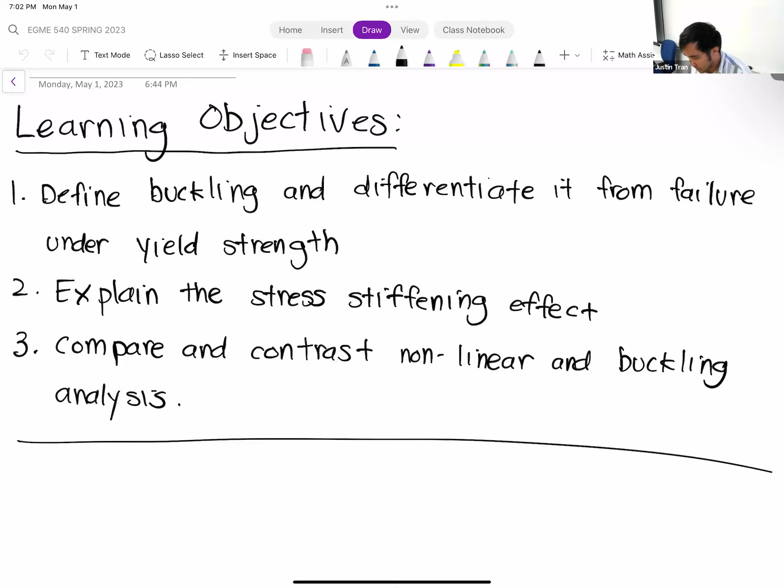Okay, all right, so let's go ahead and get started. Today's lecture should be pretty short, so hopefully we'll end early, just because the amount of content is not that big. The topic for today and the topic for our activity Wednesday is this idea of buckling and stress stiffening.

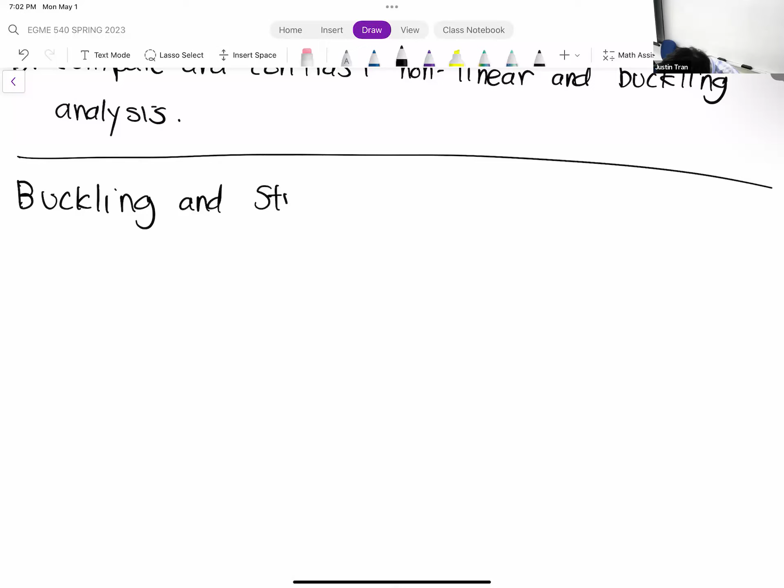So I kind of saved this topic for last for a couple of reasons. The main reason is because it's pretty simple, there's really not much to it in terms of answers, so it should be a fairly short activity. Today's a fairly short lecture as well. I think it's kind of good to end on something like this, especially as everyone's starting to work on their final project. But I think it's also a little poetic in a sense, because it brings us back a little bit to where we started in this semester.

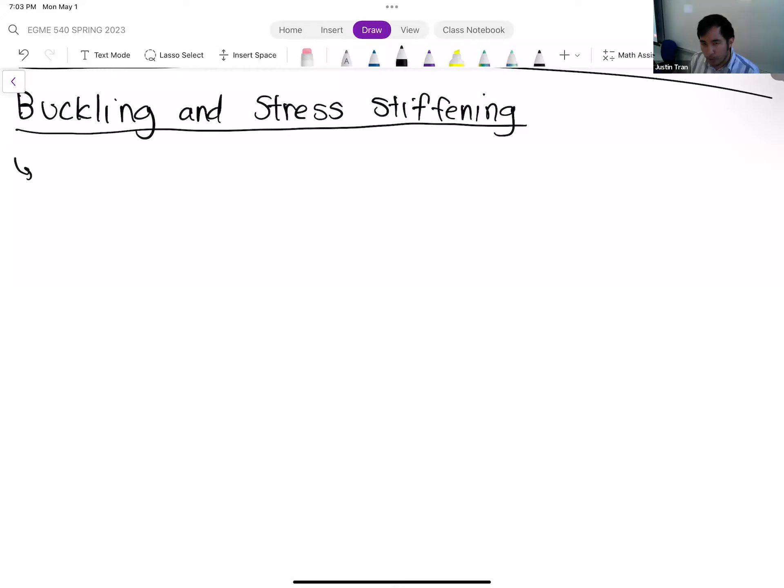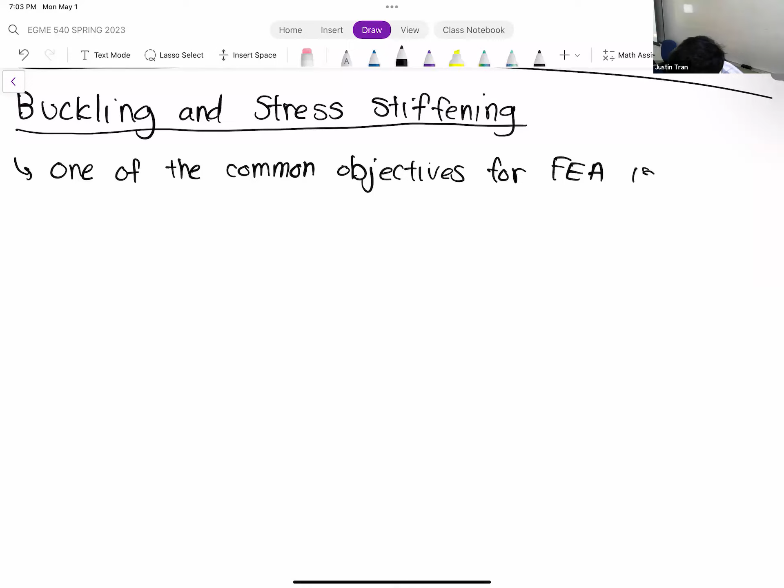Okay, so let me bring us back then. One of the objectives that is commonly used for FEA, for a lot of our activities, is we want to determine if a structure is going to fail under its given load. So we have our structures, we apply our boundary conditions, we apply our loads and constraints, and we want to check and see if it fails. The primary way that we did this was that we ran FEA and we checked the equivalent stress field within the structure.

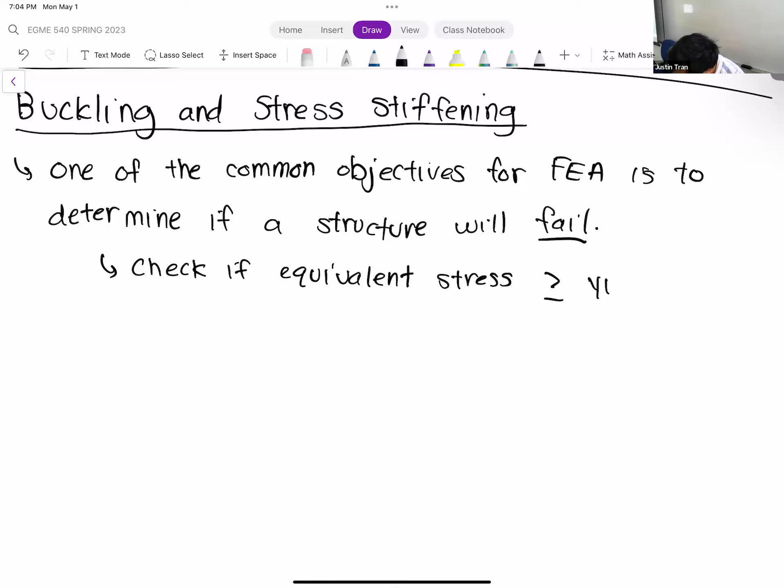And what we said was that if the equivalent stress was greater than, or greater than or equal to, the yield strength of the material, then the structure would fail. Of course, we had things like factor of safeties that would modulate that as well, but generally that was our approach. So we took our CAD models, applied our boundary conditions, checked the equivalent stress, and checked to see if it was greater than the yield strength.

That's one way for a structure to fail, right? I'd say that's the most common way, or the way people generally think about it. But there are other ways that structures can fail as well. This criteria is often reliable when the structures are failing under tensile load, so when the structure is basically being pulled apart.

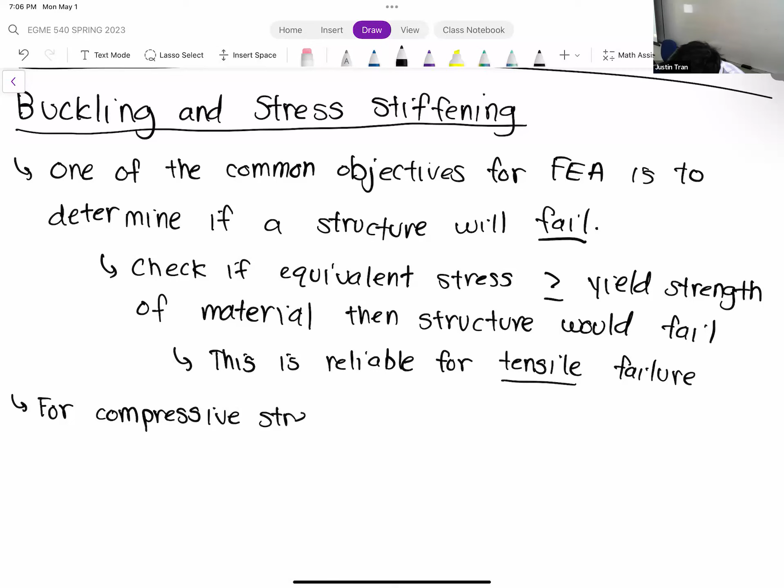So something a little bit different happens when a structure is subjected to compressive stresses, stresses that push the structure towards itself. And so for compressive loads or compressive stresses, we have to worry about buckling as well.

So what is buckling? I think the easiest way to show buckling is through a visual example. Let's go over an example that many people have experienced firsthand, which is crushing a can of soda or a can of ginger ale, or just whatever you drink from a can.

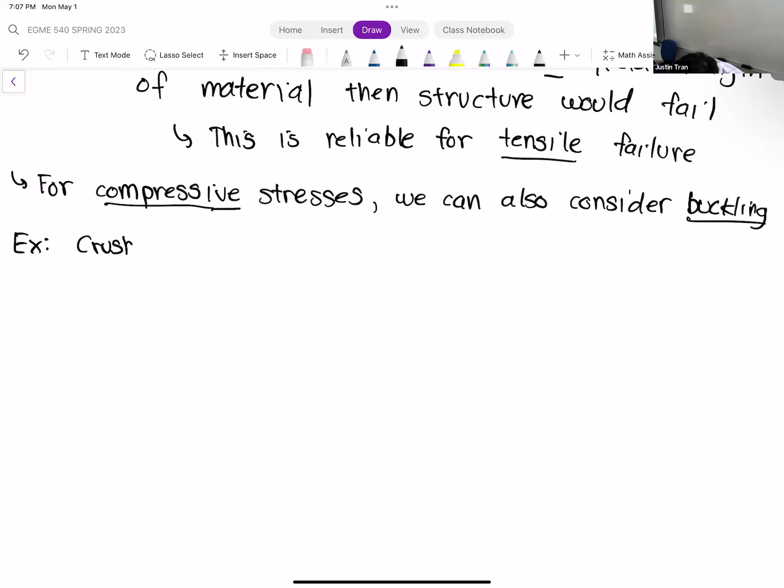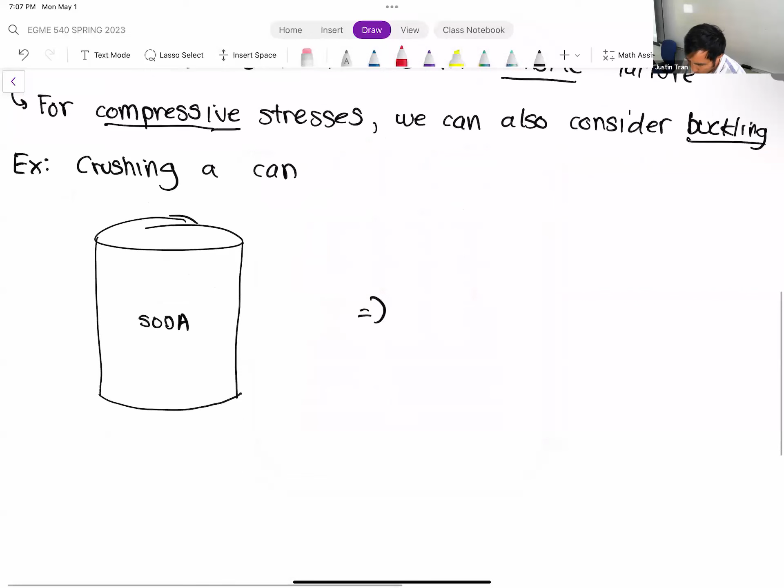So let's say that we have a can of your favorite soda, unspecified because I'm unsponsored by any soda companies, at least not that I'm aware of. Let's say that you put this can of soda on the ground and you step on it with your foot. What that's going to do is apply a compressive load, loads that squish the can like this.

What you should notice, and what you can probably imagine in your head, is that this soda can is going to crunch together, right? So it's going to end up something like this, much shorter than it was before. It still has its ring shape, but the structure is compressed like this. And so the sides of the soda can have almost crumpled, like a piece of paper.

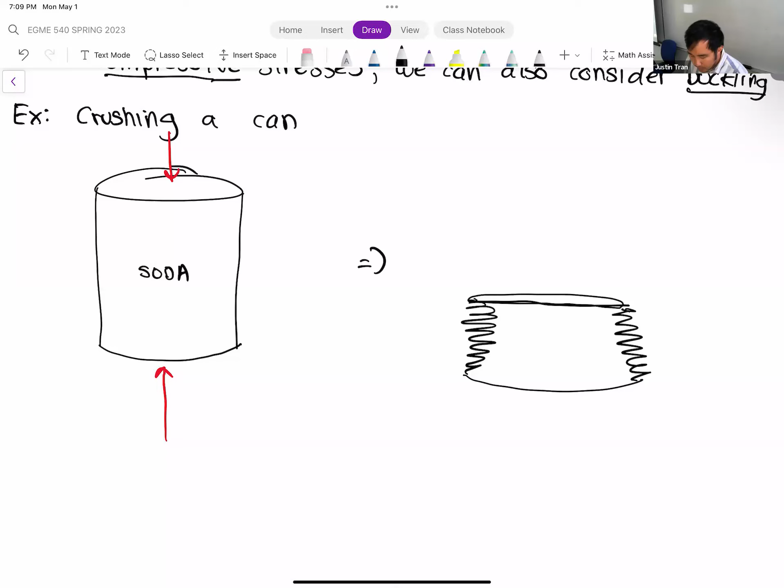So what's happening here is actually interesting. On one hand, you can postulate that by applying this compressive stress, or this compressive load, we've increased the amount of equivalent stress in the can beyond its yield strength, and so what we're observing is yielding. That is possible, and that could be the case for some cases. But another thing that's happening here is something called stress stiffening.

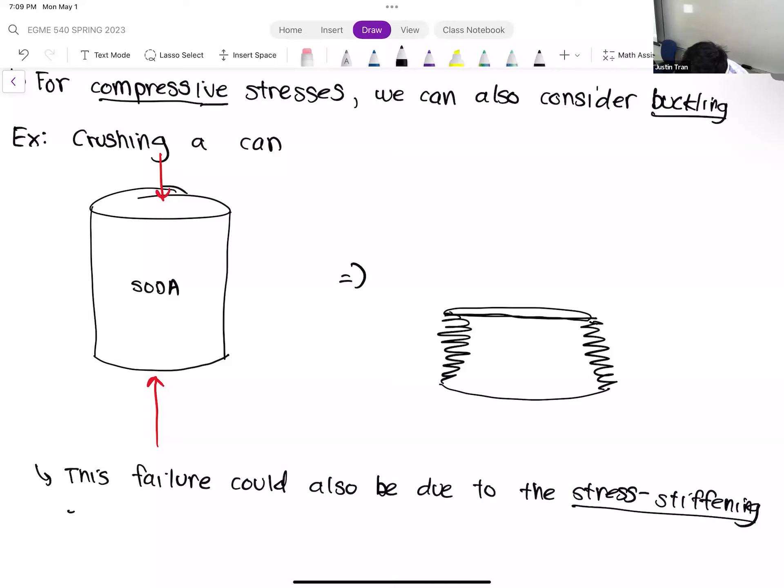And so the stress stiffening effect gives a reason why we see that kind of jaggedy look, that crumpled look that you associate with crushing a soda can, or even crushing a water bottle as well.

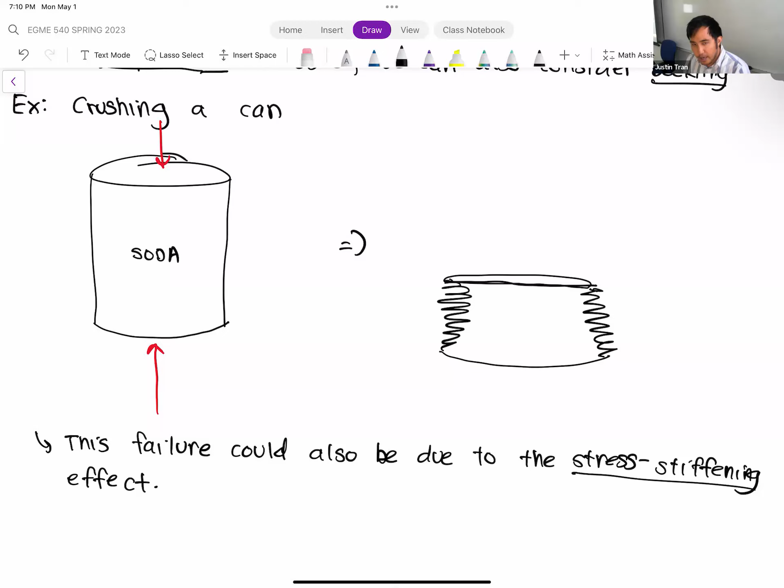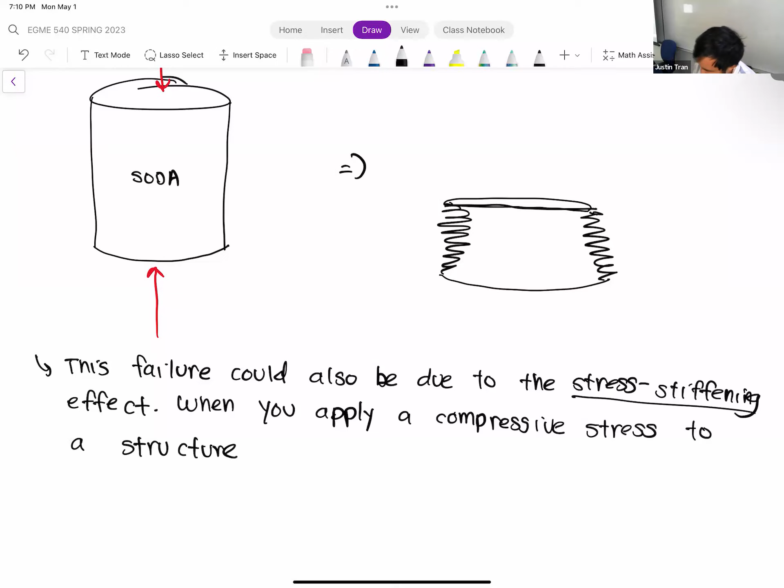So the name for this effect is kind of interesting. Normally this effect is brought up in different contexts, that's why it's called the stress stiffening effect, but we're actually going to be looking at the opposite, so you can almost think of it as the stress weakening effect. Because what happens is that when you apply a compressive stress to a structure, basically a stress that's going to push the particles of the structure closer together, the bending stress or bending strength of the material will go down.

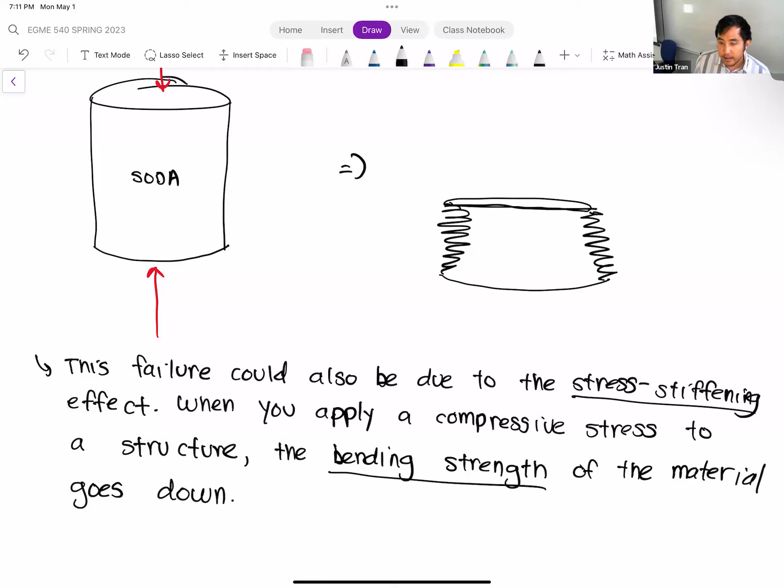And so, of course, the operative word here is bending strength. Bending strength is basically the ability for your structure to resist bending moments and bending failure. So it's very specific. And if you look at the structure of this crumpled soda can, you can see that I drew it in a very specific way with lots of bends, right? So all these jagged points are basically lots of bending failure.

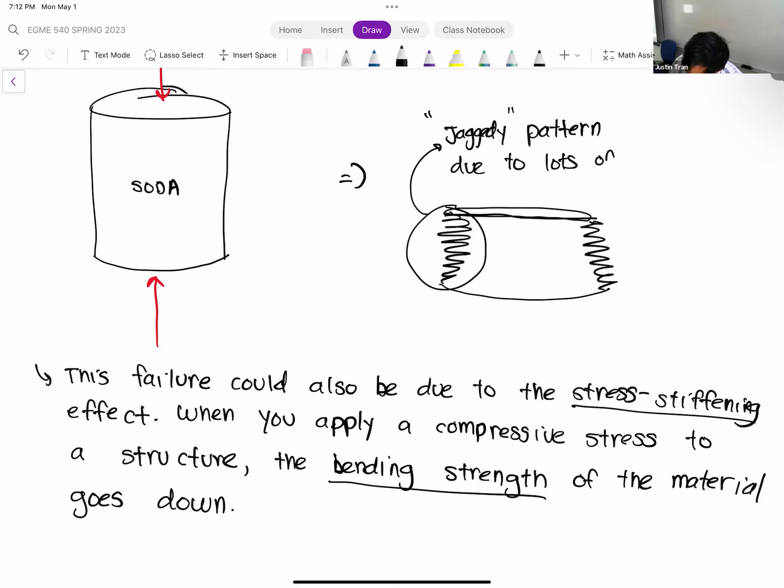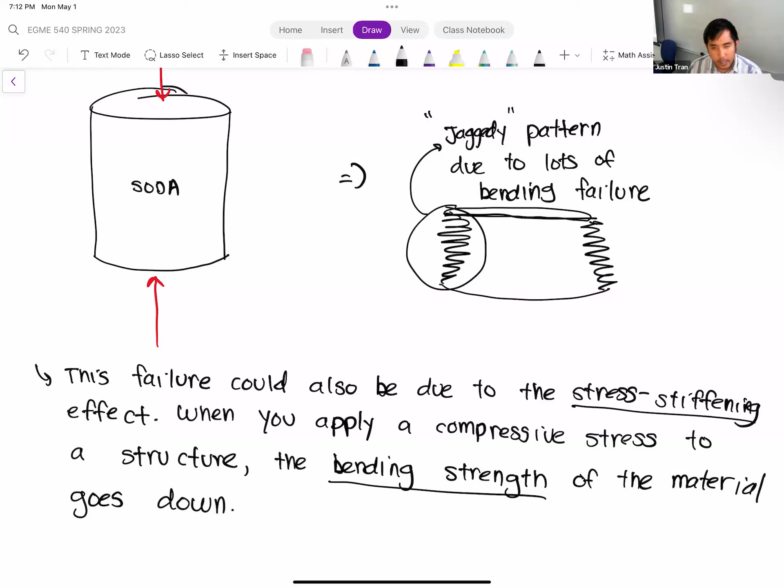That's why you have that pattern. On the flip side, the opposite of this effect, which is why the effect is called stress stiffening, is that if you apply a tensile stress, you actually increase the bending strength.

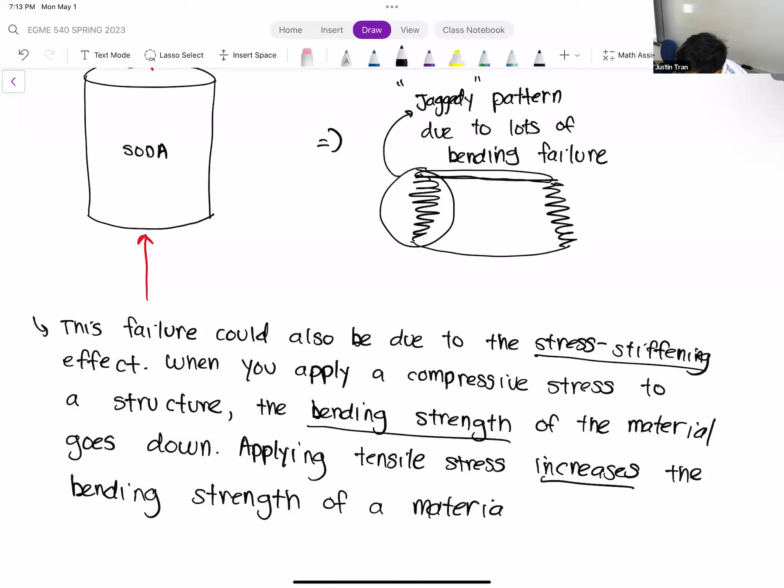Right, and so that's actually interesting. If you actually took the soda can and pulled it apart lightly, there's a couple things you're dealing with there. If you pull the soda can away too much, then you're just going to have regular tensile failure, and you'll rip the can apart. But if you pull on the can with just enough tension, and you try to bend it, it's actually going to be harder to bend than if you didn't apply that tensile stress at all. A very interesting effect.

But we're not worried about tensile stresses here. When we're talking about buckling, we're talking purely compressive stresses. All right, any questions on this so far?

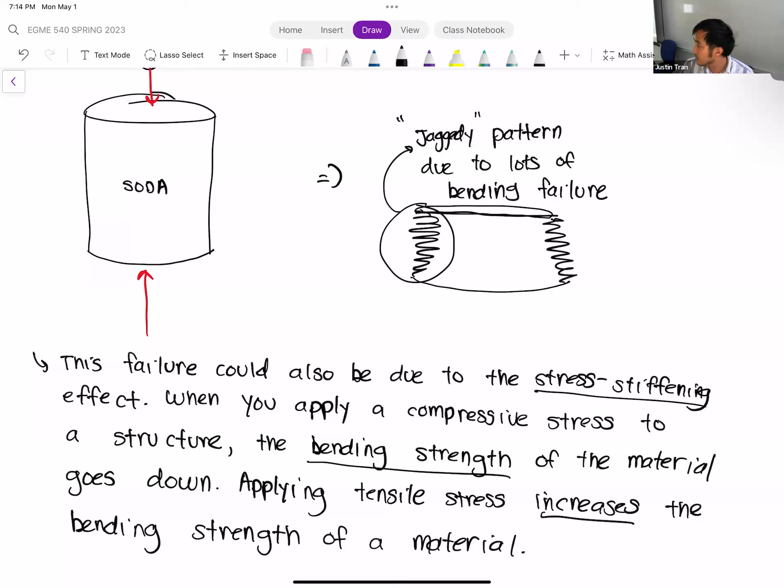Okay, so that's stress stiffening. So what is buckling? Buckling is kind of a special case of stress stiffening. So when a structure buckles, what we mean by that is that there is enough compressive stress applied to our structure such that the bending strength approaches zero, or is basically almost zero.

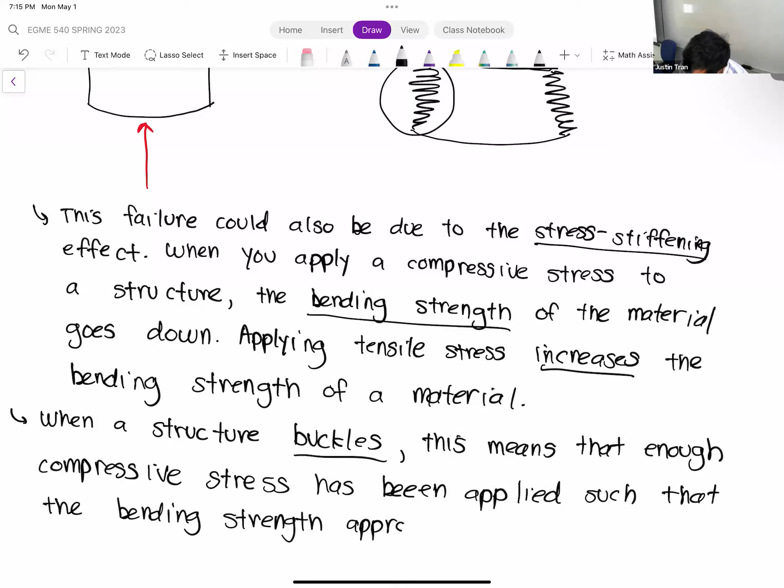All right, so that's what we mean by buckling. Buckling is when you push the compressive stress to a certain point where the bending strength is basically zero.

Okay, sorry. Oh yeah, sure. Dude, sorry, you scared the shit out of me.

Right, so buckling is you basically compress the structure enough such that the bending strength approaches zero. That's a very special point, because once the bending strength approaches zero, any slight perturbation will cause the structure to completely collapse on itself.

And so in theory, if you have a soda can and you're applying a compressive force to it, if you were to apply it perfectly such that it perfectly compresses the soda can, you can keep applying that compressive stress and buckling wouldn't occur. What I mean by that is that the structure actually wouldn't collapse.

Because the interesting thing for most engineering materials, if you look at just purely the compressive strength of the material, usually it's going to be a lot higher than the tensile strength.

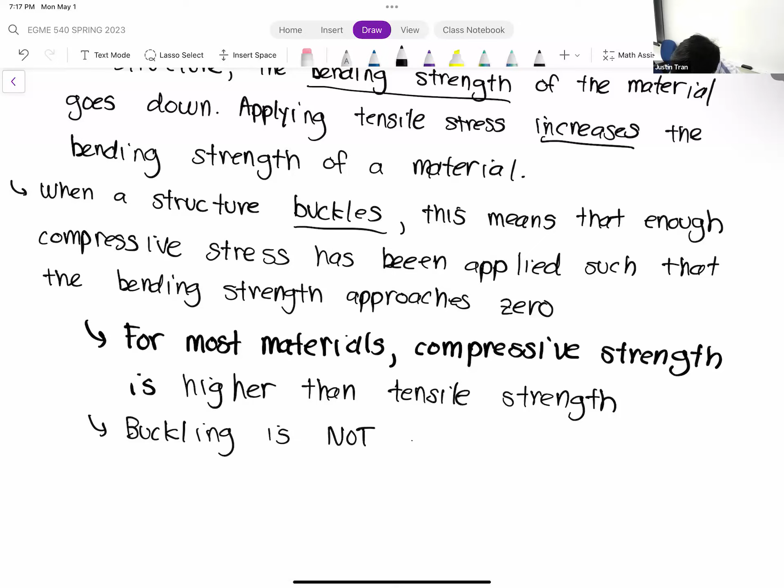Buckling is not the same as pushing our structures so close together that we're exceeding the compressive strength. What buckling actually is, is that by applying that compressive stress, you're weakening the bending strength of the material. So buckling is actually failure in bending, not failure in compression.

So it's a nuanced point, and something you might say is kind of pedantic, because technically speaking we can still say it's compressive failure since it's failing when we're applying compressive stress, but it's not failing because we're reaching that compressive strength. It's failing because of buckling.

If you're a contractor, someone building a structure, you'd probably say who cares, it's failing either way, doesn't matter if it's failing in buckling or compressive failure. But for those of us on the analysis and design side, that's important, because there are ways to design your structure to be strong against buckling, but that may leave you a little more vulnerable to compressive failure.

Any questions on this so far?

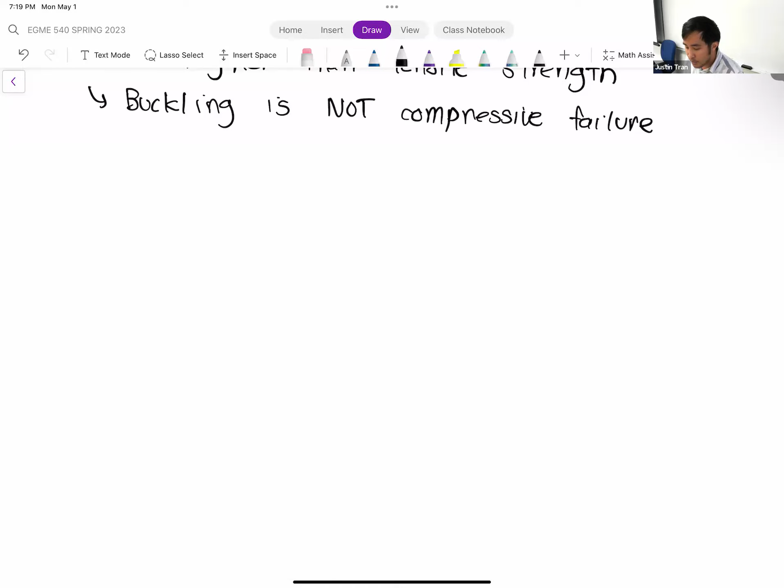You can do this in ANSYS too. We're not going to do this in ANSYS, but you can do this kind of thought experiment, and you can see the stress stiffening effect in action.

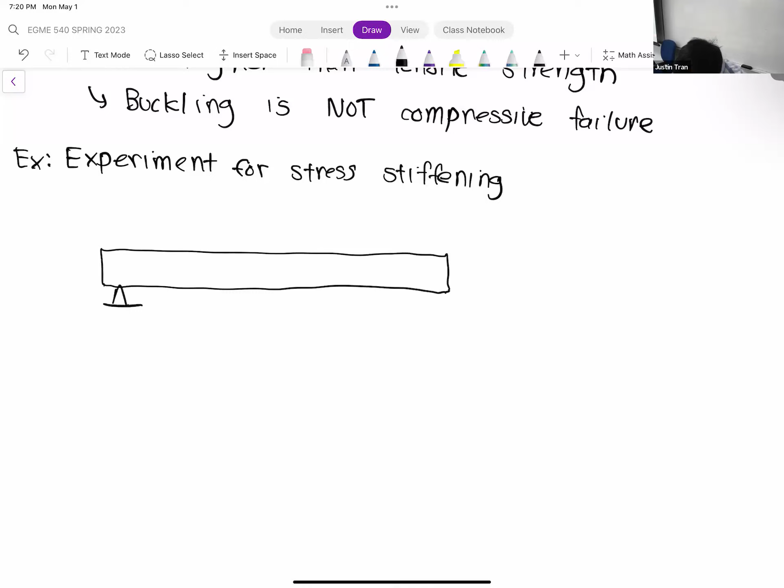All right, so for this experiment, you can have a typical beam here. Let's go ahead and fix the beam on one side, and then on the other side we'll apply a roller constraint. So we'll let the beam translate freely in the X direction on the right.

On top of the beam, we're going to apply a distributed load. This distributed load we'll call P. In the X direction, we'll apply a force F. So what the force F is going to do, or the role of the force F, is that this force F is going to let us apply basically a tensile or compressive stress on the beam.

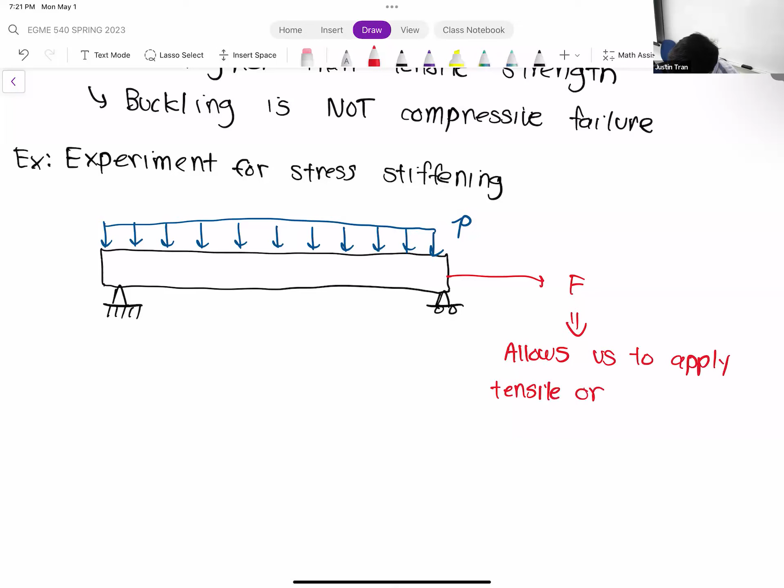So the experiment we're going to do is modify this force F, and see how that affects the bending strength. This load P, I've applied in a very specific way, perpendicular to the beam, so what P is going to do is apply a bending stress to this beam.

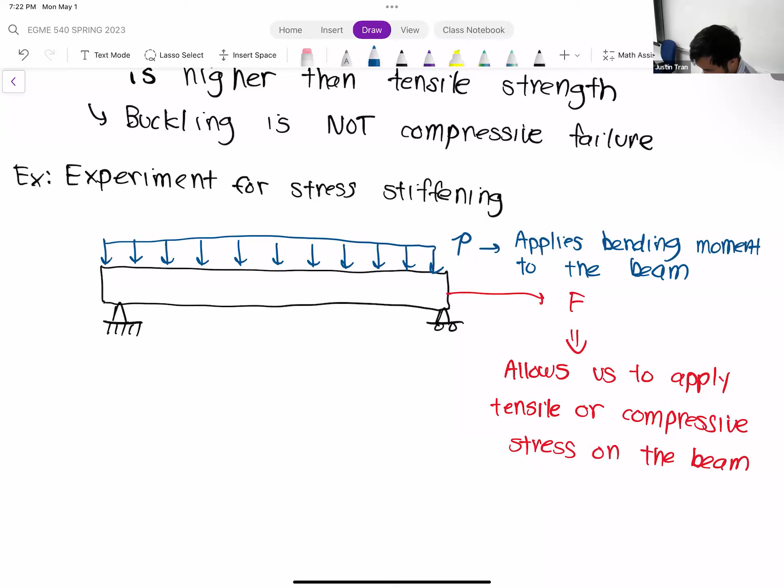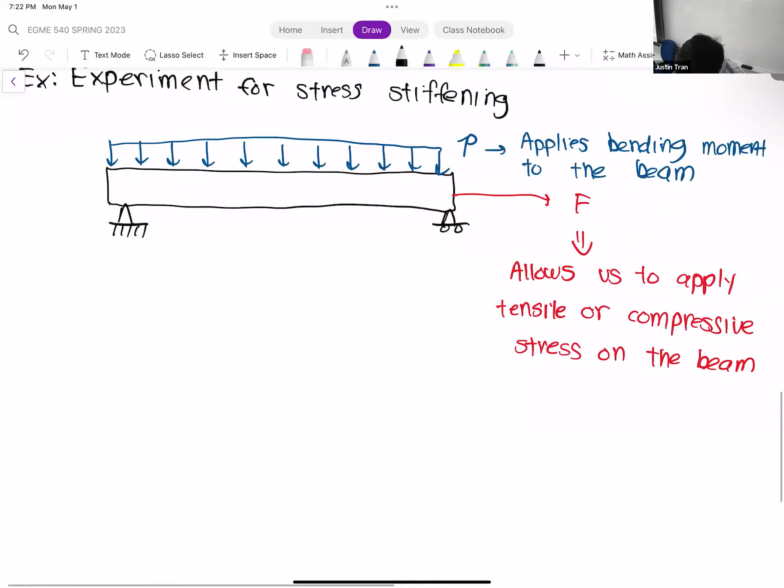In this experiment, we're going to keep P constant, applying basically the same amount of bending strength or bending stress to the beam. But what we're going to vary is the value of F across various values.

So as we change the value of F, we're going to start from a tensile load, and then make it negative and compressive. As we change F, we're going to observe the maximum deformation in the beam.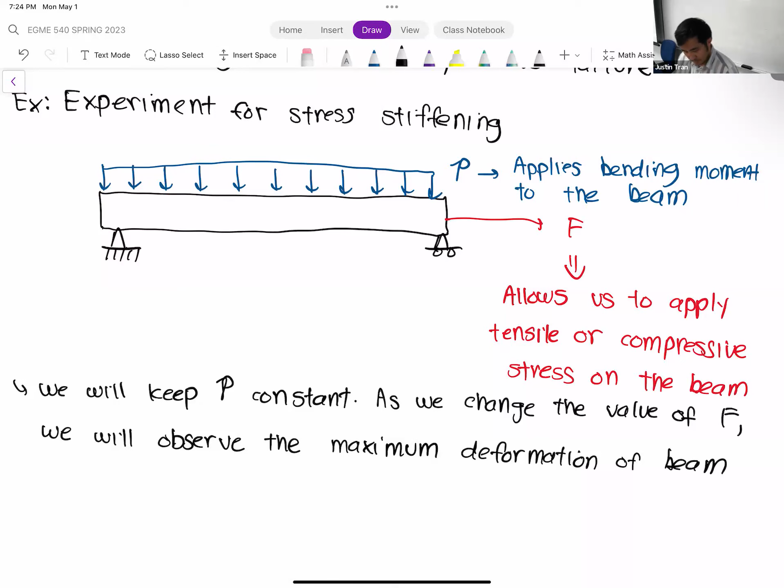There's a couple of things you should know about this kind of experiment. The first case is what we expect in terms of the trend: as F goes from tensile to compressive, what we should observe is that the deformation should go up, because the bending strength is going down due to the stress stiffening effect.

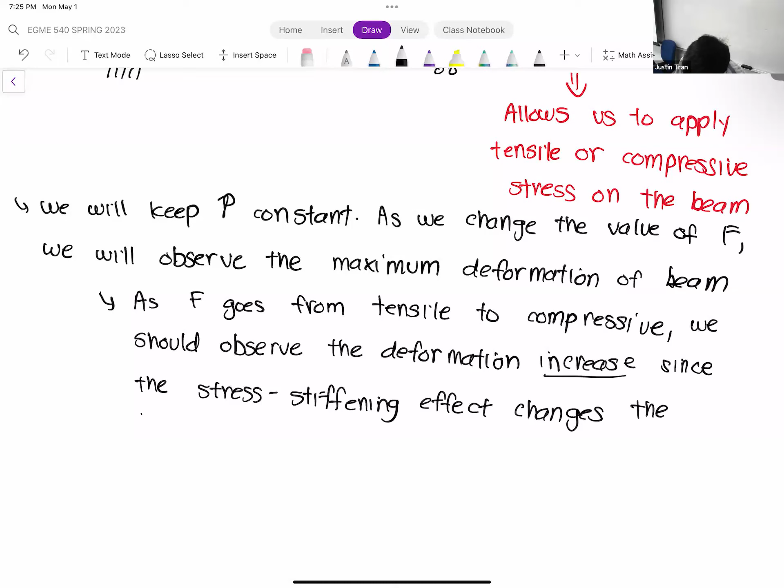So that's the first thing you'll notice: the lower the strength, the higher the deformation is going to be. Another note is that this deformation is going to be perpendicular to the beam, so basically you should see the beam increase its amount of bending.

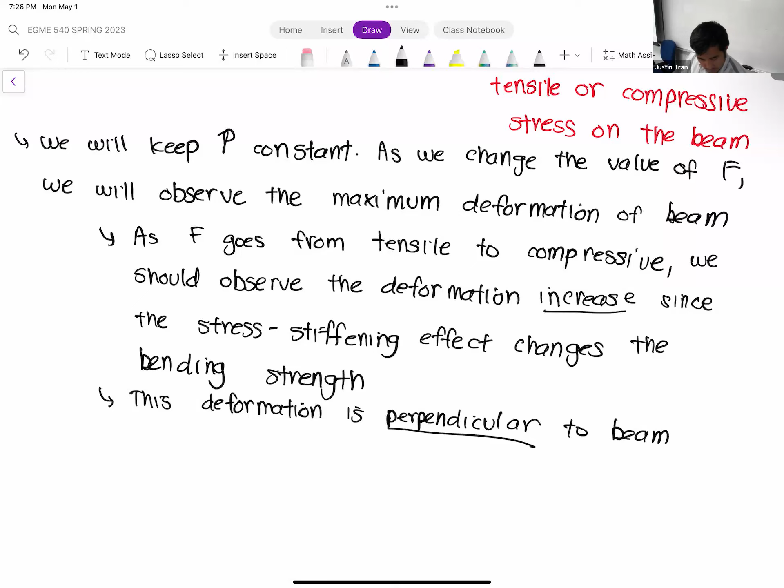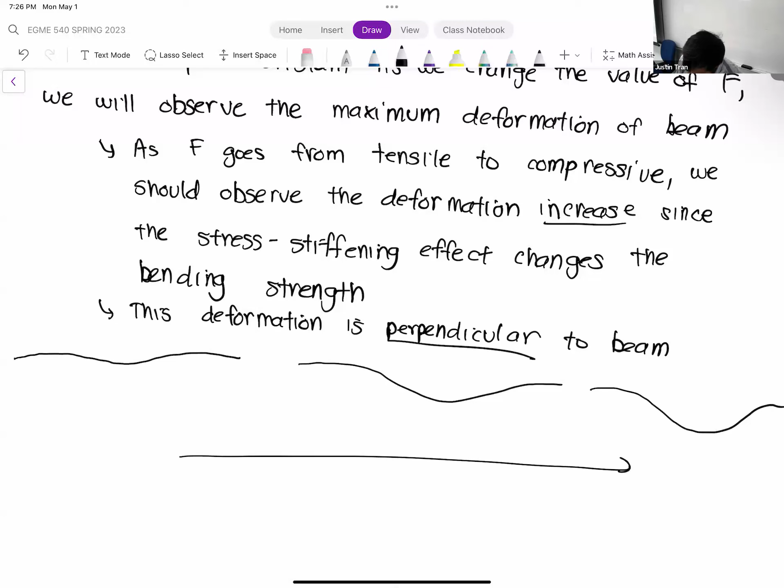In other words, what we're going to observe—and I'm going to exaggerate here, it's not going to be this much—is that it's going to look like this. We're going to start with something a little bit deformed, and then it's going to go more like this, and then more like that. So we're going to go in this direction: here we have the tensile mode, here we have compressed.

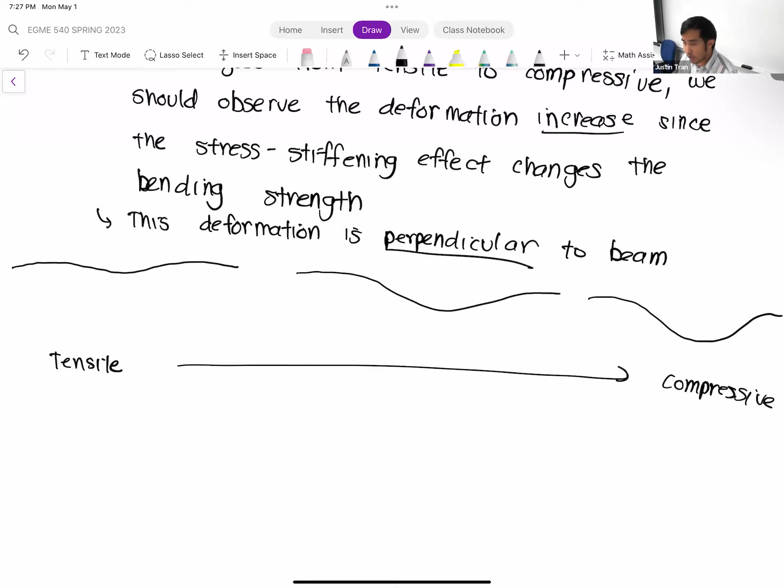I wanted to mention that because it's a little bit hard to see, or hard to envision from the figure I'm about to draw. But just remember that this is bending—we're talking purely about bending strength when we're talking about stress stiffening.

And so the graph for this looks like the following. We're going to have a graph that looks like this—let me go ahead and draw the middle point here. On the horizontal axis, we're going to have the value of F, and on the vertical axis, the amount of deformation. This dotted line right here is going to be a value of 0 F.

To the left of this dotted line are going to be compressive forces of increasing magnitude as we get closer and closer to the vertical axis. And on the right of the dotted line is going to be tensile forces, with increasing magnitude as we get further and further away from the dotted line.

You can do this in ANSYS—make a very simple CAD model for a beam, apply these loads, and observe how the deformation changes as you decrease the value of F. What you should see is a graph that looks like the following: a slow upward trend.

So this is generally what we expect. As we make the compressive stresses within the beam higher and higher, that decreases the bending strength, and so the amount of bending deformation is going to go up and up. Any questions on this so far?

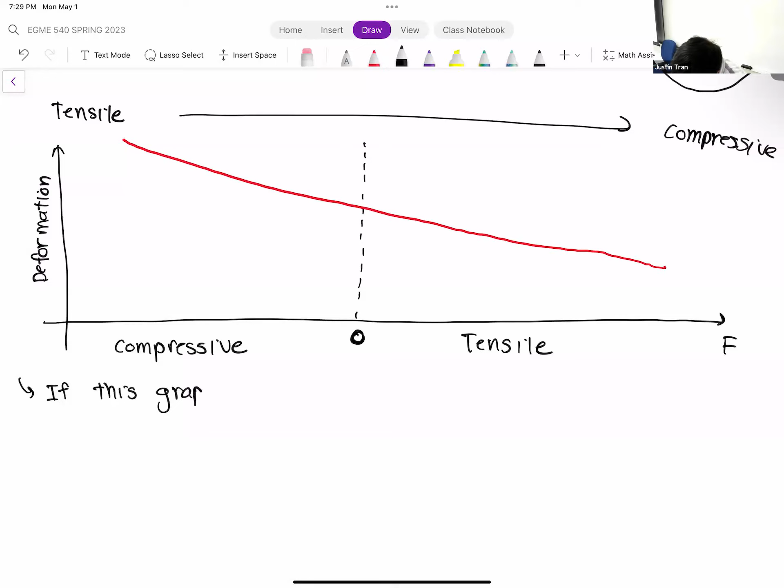And so if we continue this graph to the left, you can see from this graph we have a fairly steady increase. Going from right to left, the increase is getting slow, or it's fairly steady. But if we keep continuing this to the left, making F more and more compressive, eventually we're going to reach a point where the graph is going to shoot up.

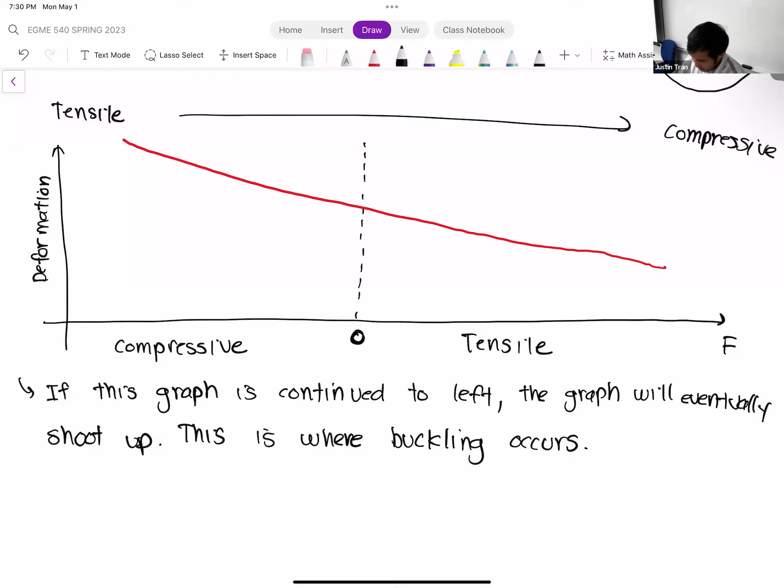At this point, this is when buckling is occurring, because when the bending stiffness is basically 0, that means we're going to have basically infinite deformation—in other words, our beam is going to fail. Eventually we'll reach a point that looks like this: steady, steady, steady, and all of a sudden it shoots up like that. This value here, where it starts to shoot up, is the point of buckling.

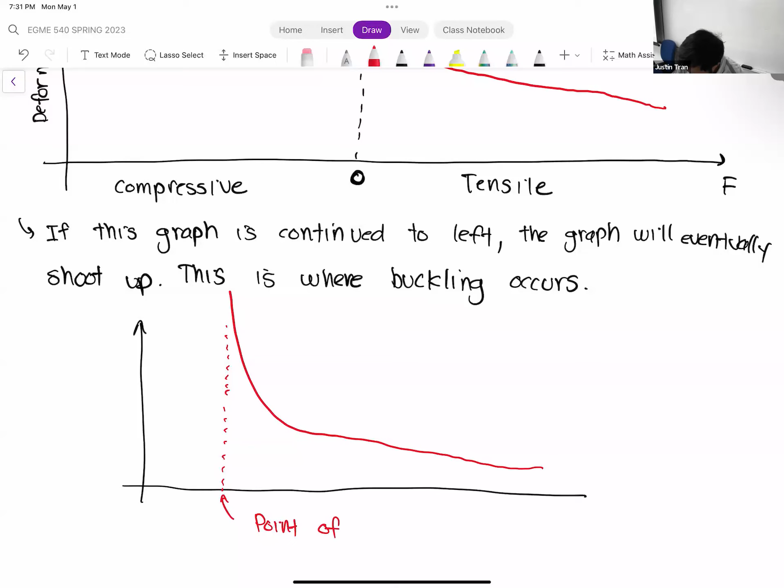So this point is really important, and this is often what we are interested in from an ANSYS perspective: where's the point of buckling.

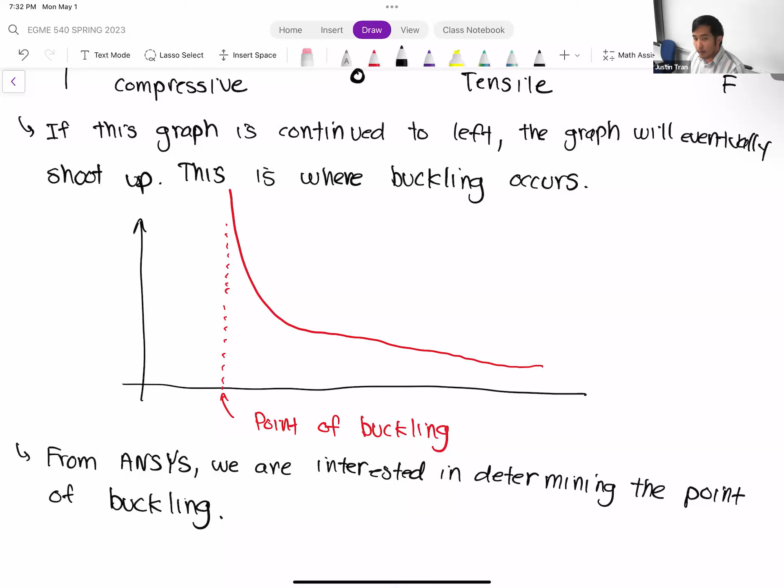But we want to know, for the loads that we've applied onto our structure, are they going to cause buckling by themselves? Usually not. For a default configuration, as long as your structure is in a fairly reasonable state, you're not going to cause buckling. But from then, what we can see is, if we were to increase the amount of loads, what's the point of increase where we actually are going to see buckling? In other words, how much?

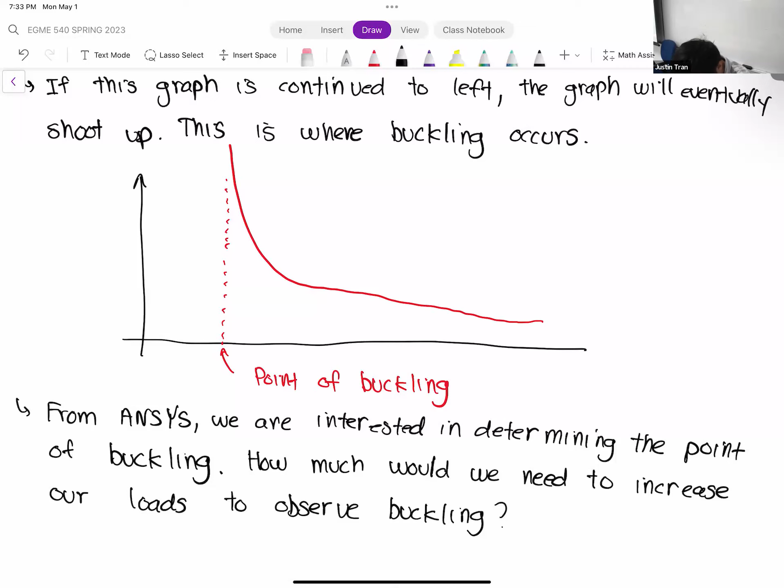So basically, when we do buckling analysis in ANSYS, we're doing the exact same thing as this experiment. In this simple experiment, all we did was keep increasing the compressive load until we reached the point of buckling. For a real structure with real boundary conditions, this is not as easy to do because our loads are in a much more complex state. So in these situations, we rely on ANSYS to help us give us that answer.

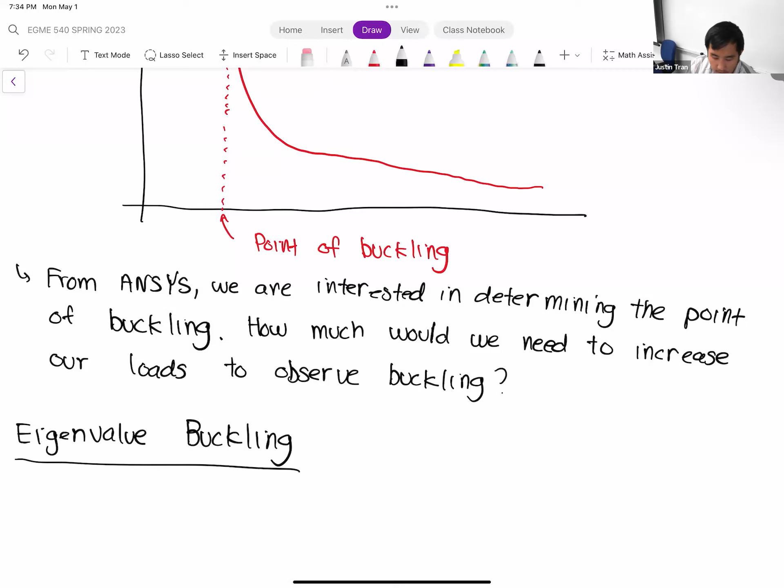And so the tool that we're going to use in ANSYS is called eigenvalue buckling. For the rest of the class today, we're going to discuss how to set this up in ANSYS and what you can expect from the results, and how to interpret them.

Dr. Tran, I might have missed this, but is the Euler's buckling equation used at any point in ANSYS? I think for simple beams it is, and we'll go over that in the end. But for more complex structures with more complex geometries, I think it has a different way of computing that.

I see. And that's eigenvalue buckling? Correct. But actually, the activity that we're going to be doing on Wednesday is essentially a structure of beams. In fact, I think the geometry has already been converted to beams for you. So in theory, you could apply Euler's theory to predict buckling as well, because it's essentially a beam. It's a complex, kind of triangular structure, but in theory you can use Euler's beam theory for that. So I think ANSYS does an approximation of that to an extent, but for three-dimensional or even two-dimensional structures, I think it does something a little bit different.

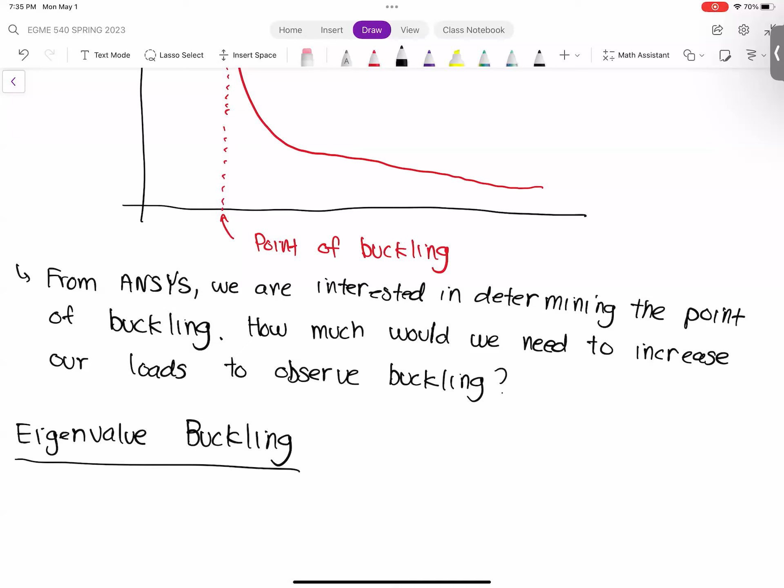Sounds good. All right, so eigenvalue buckling is the tool that we're going to use, and it's used a lot in ANSYS because it's relative to a lot of other things we've done in this class. It's relatively simple and relatively fast to do.

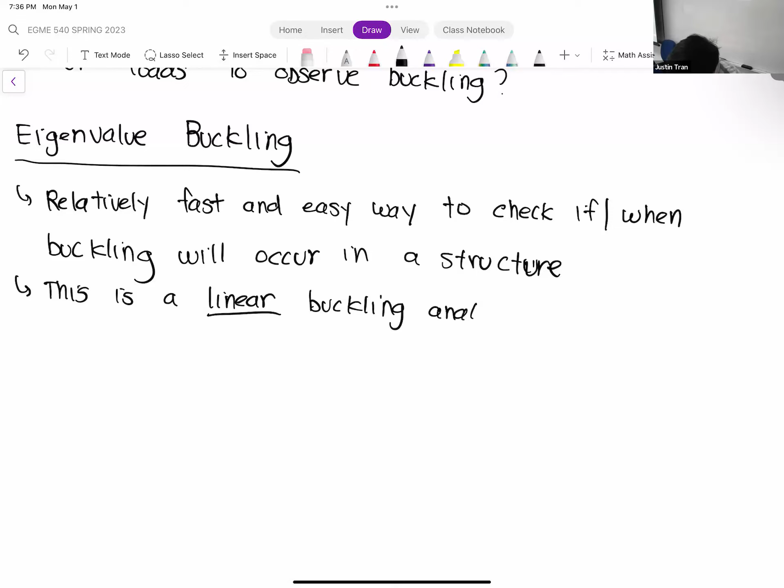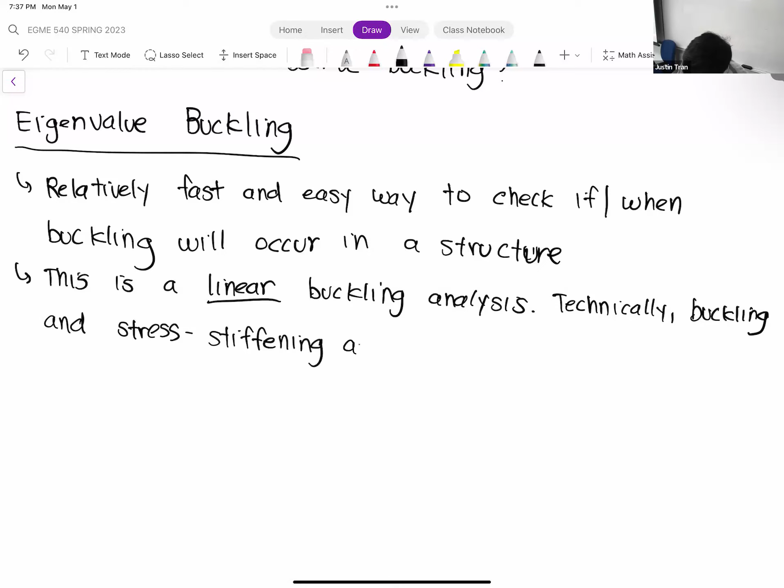One note that I want to make, though, is that this eigenvalue buckling is what we call a linear buckling analysis, with the emphasis there being on linear. This is important because, technically speaking, when you're talking about buckling and stress stiffening, these are all nonlinear effects. And so that experiment we talked about earlier with the beam, technically that was done with nonlinear effects turned on -- that was with large deformations turned on.

So if that's the case, if buckling and stress stiffening is nonlinear, then what does it mean to do a linear buckling analysis? That kind of seems like a contradiction. A linear buckling analysis is reliable, it is a real thing. But all that really means is that all of these buckling and stress stiffening effects, we're basically doing a linear approximation of these effects.

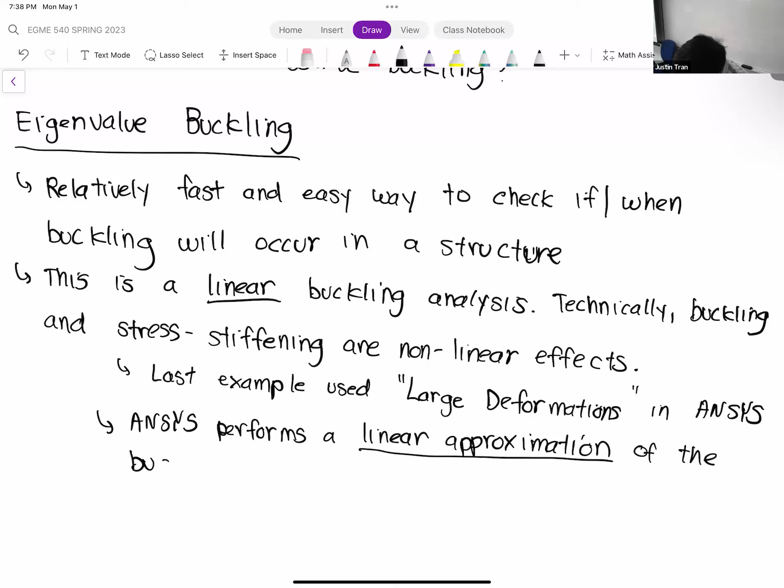So this is actually a problem because in approximating the buckling effects, it tends to overestimate the amount of loads that are needed to cause buckling.

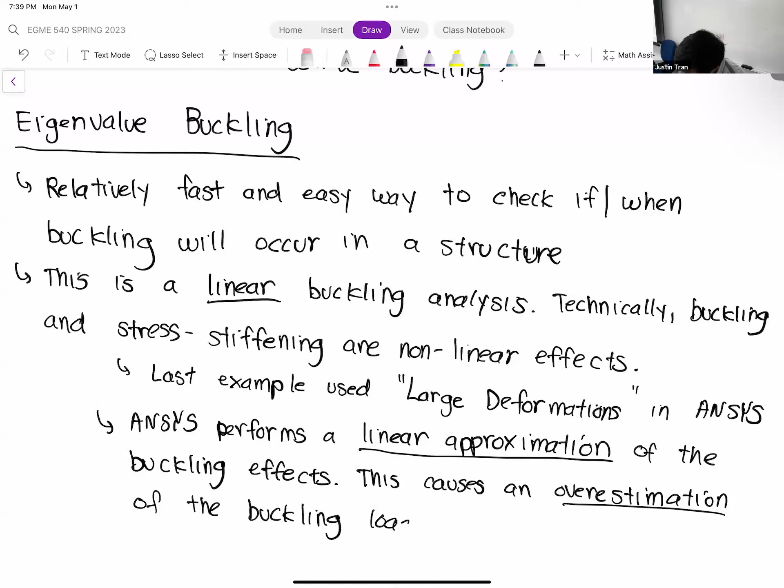So that's bad. In a world of conservative design, when you want to make sure that your structure is going to be sound, you don't want to overestimate, at least in your analysis, the amount of loads needed for buckling. Because if you have a situation where you're designing a structure and your analysis says it can withstand, let's say 10,000 pounds in buckling, but if that's an overestimation, and in reality the structure buckles at say 8,000 pounds, now you're in trouble. If the safety factor was relatively low and you expose the structure to 8,000 pounds, your structure is going to fall apart and you're probably going to lose your job.

So I'm bringing this up because it's important -- when you're using eigenvalue buckling, you want to make sure that you have an adequate factor of safety on your results.

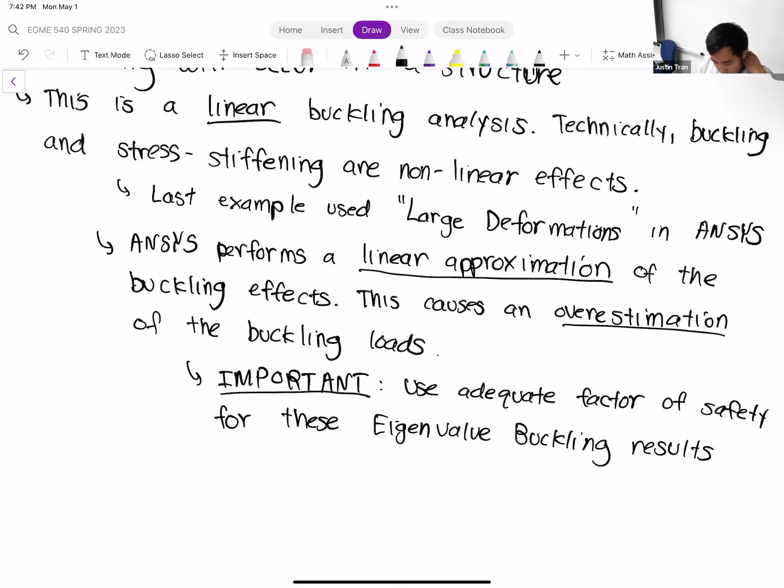Okay, so how do we actually initiate this? How do we actually perform eigenvalue buckling? Just like modal analysis, our first step is going to be a static structural simulation.

What we're going to do is link the eigenvalue buckling analysis to the static structure.

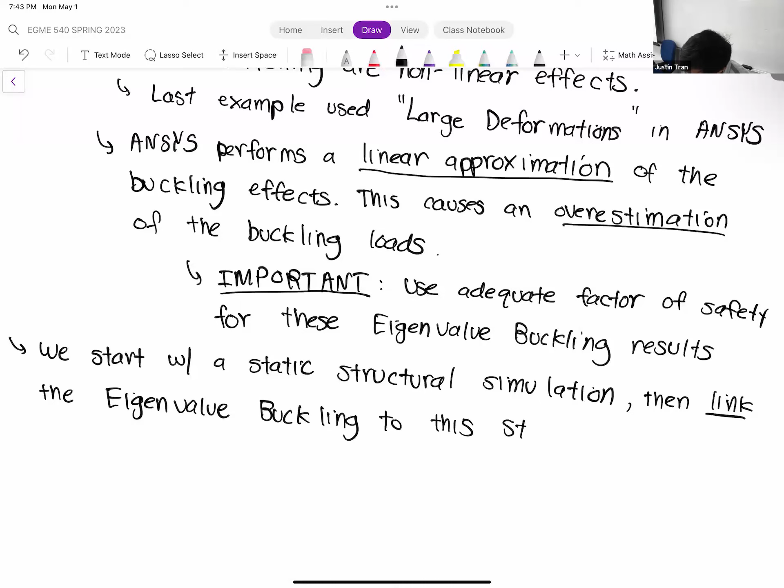This is important because the way eigenvalue buckling shows your results is going to be confusing at first. It displays your results as what's called a load multiplier.

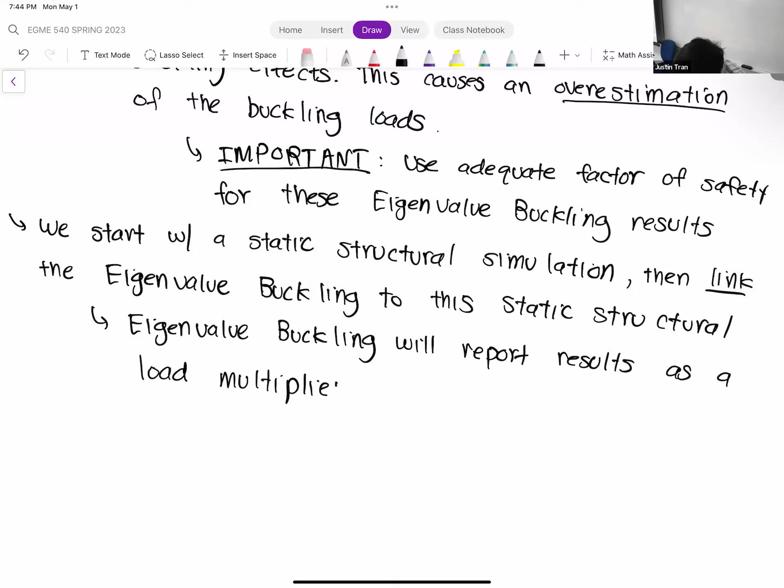What that means is that it's going to read all the loads that you applied in static structural. Then it's going to tell you that if you were to multiply those loads by this particular factor, that's how much you would have to increase the loads to cause buckling to occur.

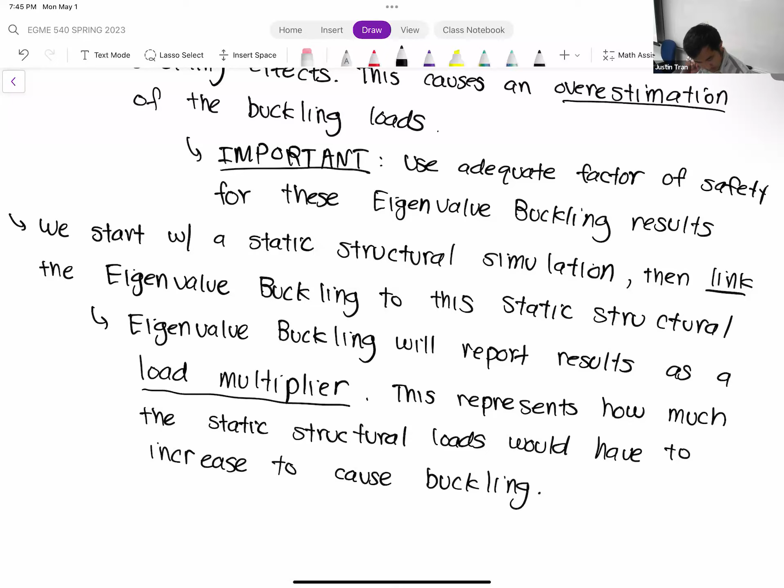Let me show you a quick example. Let's say we have a triangular structure that looks like this, with a couple loads being applied: a load of 500 newtons here, and a load of 300 newtons.

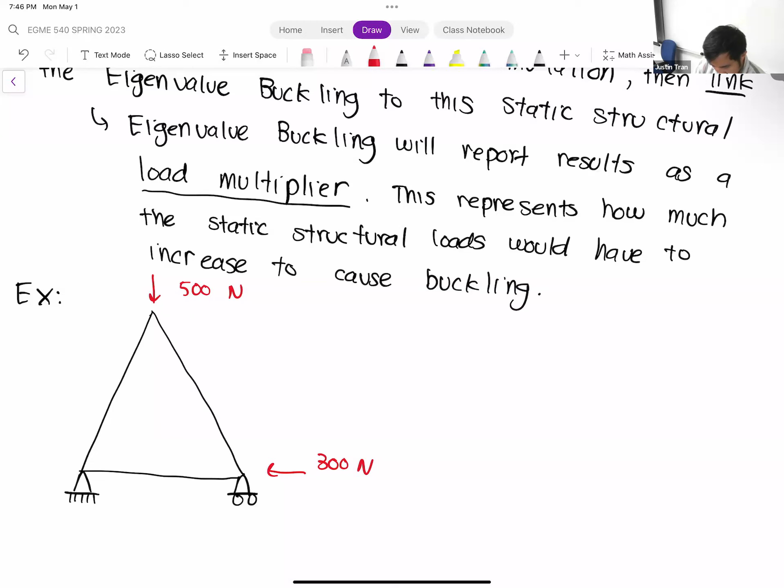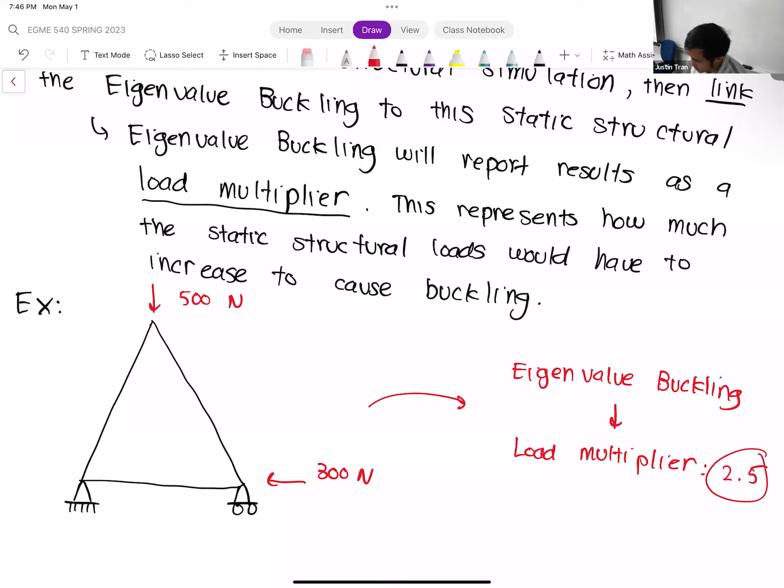So if you were to run this through eigenvalue buckling, maybe what it will tell you is that in order to cause buckling, your load multiplier is going to be maybe 2.5. That means if you were to increase all the loads in this configuration by a factor of 2.5, that would cause buckling.

In other words, if I were to draw the same geometry here and increase these loads by a factor of 2.5: 500 times 2.5, that's 1250 newtons. 300 times 2.5, that's 750 newtons. This would buckle.

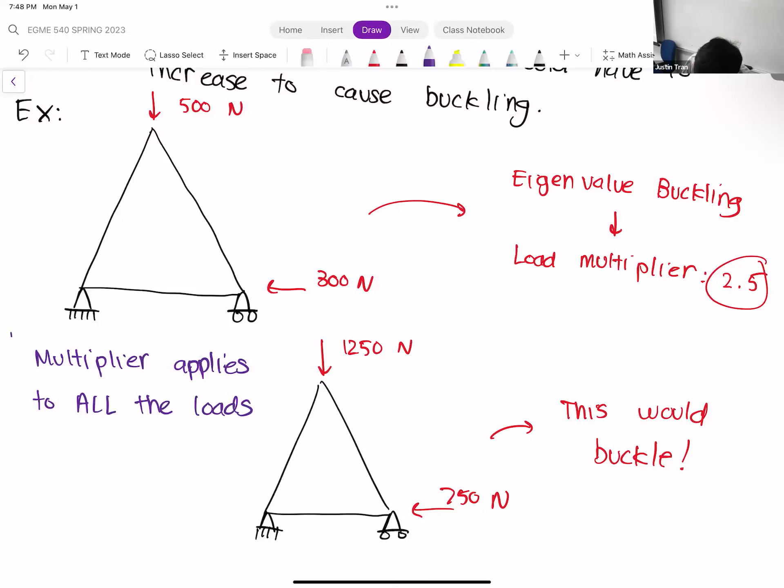One thing you should notice here is that this load multiplier doesn't apply to each individual load. That load multiplier applies to all the loads together. Keep that in mind when you're doing this, because what ANSYS implicitly assumes is that when you apply these loads in static structural and want to increase them, it assumes you keep these loads in the same ratio. That's why it applies the load multiplier to all of it.

If you're interested in individual loads in terms of what will cause buckling, you can do a more complex buckling analysis where you take each load individually. A lot of times that's what you're interested in, especially if you know one particular load is going to cause buckling more so than the others. But eigenvalue buckling is almost like a quick and dirty way to see buckling, because of its linear nature and because it applies the multiplier in broad strokes.

It's probably not going to be the one that you publish your scientific report about, but it gives you a good sense of how structurally sound or how resistant to buckling something is. If you have a buckling multiplier of like 20x, you probably don't have to go through a more sophisticated analysis. You're probably not really in danger of buckling with a 20x multiplier.

But if you go through eigenvalue buckling and get a multiplier of like even 2, I would re-examine your structure and maybe do a more complex buckling analysis to see where the points of weakness are and where you'd beef that up with design. Any questions on this?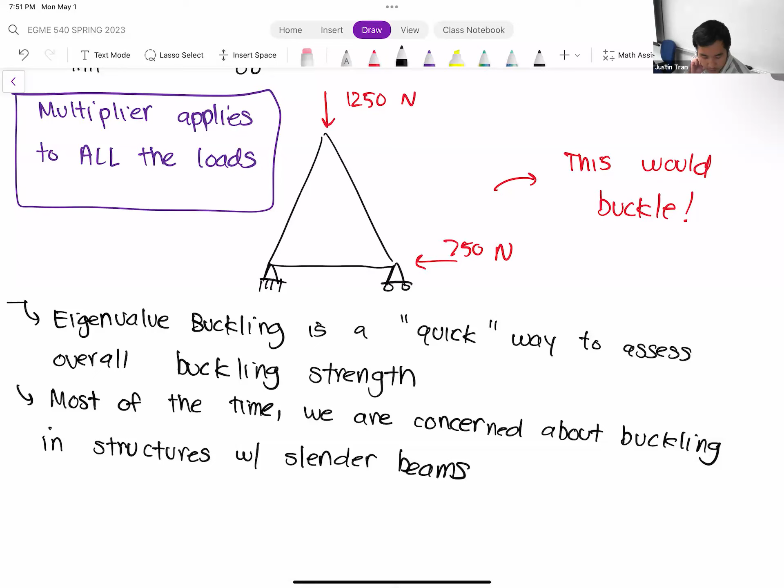And so, like I mentioned earlier, for slender beams there is an analytic formula for predicting buckling loads. That formula is the following: F, the amount of force that causes buckling in a slender beam, is given by pi squared times the Young's modulus times the moment of inertia, divided by the length squared. E here is the Young's modulus, I here is the moment of inertia of the cross section, and L here is the length.

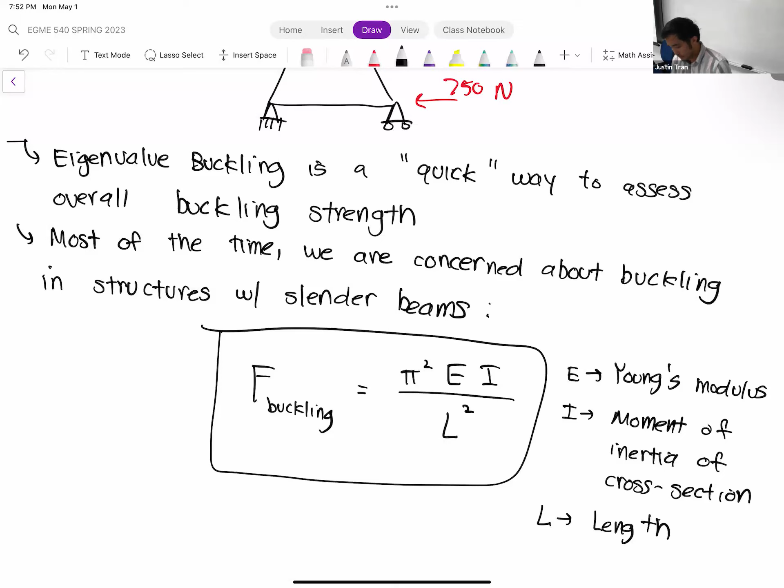Having a formula like this is always useful. We talked a couple weeks ago about verification and validation. Whenever you do any kind of finite elements or computational work, it's always a good idea to check your work, especially with equations like this. If you have an equation available, you can quickly use it to check your results and make sure they're in the same ballpark. That's always good to do.

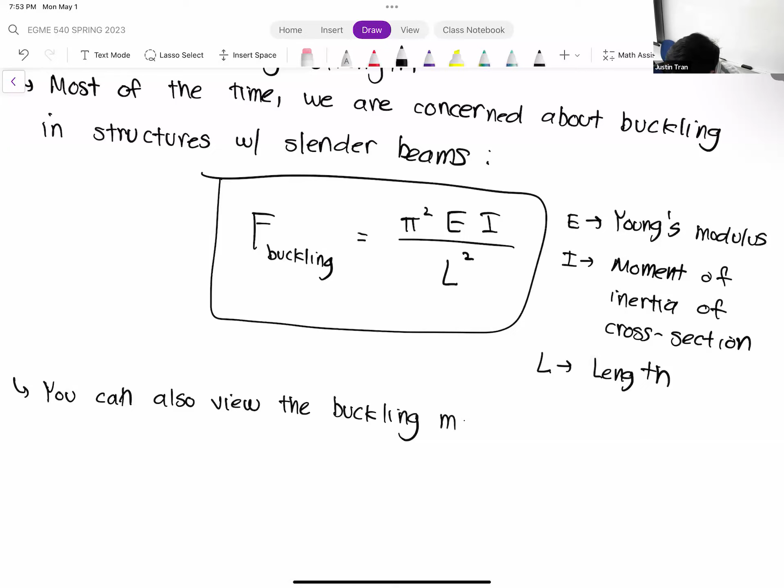Another thing you can do with eigenvalue buckling that is more cool than useful is view the buckling modes. Buckling is kind of similar to how modal analysis works. Not only do we have one buckling load, but we also have multiple modes available, and each buckling mode has its own unique way of buckling.

But even more so than the resonant modes, most of the time you're not going to see the higher order buckling modes, because if you already push past the point of first buckling, your structure is going to fail anyway. So this is more just for fun, for the mathy people who like to view these things. You can view them, but just remember that when you view these modes, they're purely for visualization purposes.

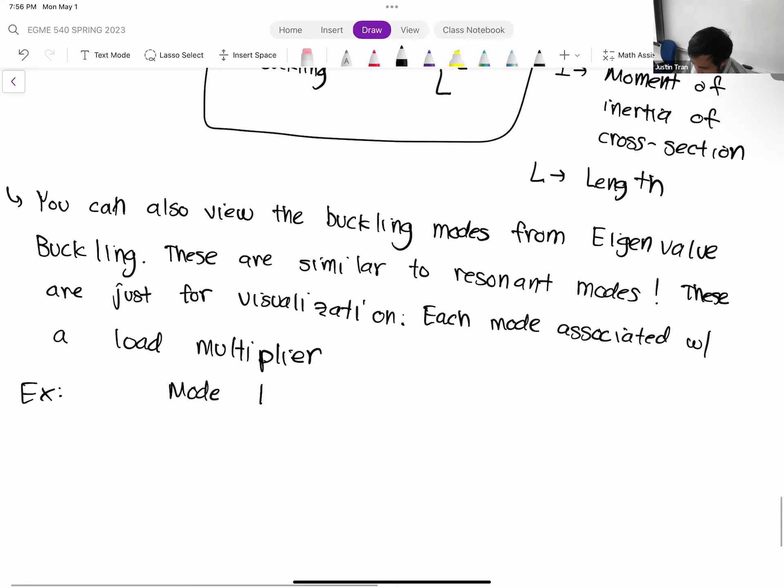For example, let's say we have mode 1: a simple beam might buckle like this. Maybe in mode 2, the bending occurs further down the beam. Again, the different modes aren't particularly useful because you're almost never going to see the higher order modes unless you really try to plan an experiment for it. You're going to fail way before that anyway, but it's kind of neat to see.

Any questions on any of this?